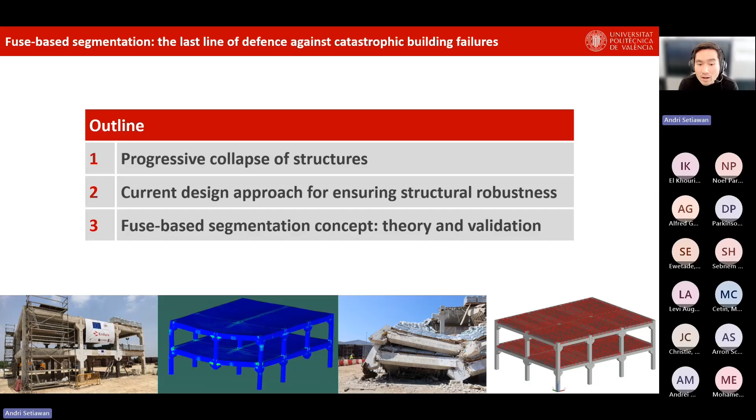The outline of my presentation today will be divided into three sections. In the first one, I'm going to give a bit of introduction about progressive collapse of structures, what are the main definitions, and what is the consequence of having this kind of phenomenon. In the second part, I'm going to discuss in more detail about the design approach that we have in building guidelines for ensuring structural robustness. And then in the third one, I'm going to focus more on the main part of the project that I'm working on, called the fuse-based segmentation concept, from the perspective of the theoretical background, but also the experimental validation. So let's start with the first part.

I'm going to start with the sentence, our world is at risk, and let's see a bit some numbers that basically show this fact.

If you haven't read this report, I would encourage you to read it. This is a very nice document, published annually by the World Economic Forum. It's called the Global Risks Report. And in the last one, published very recently, they basically brought together collective intelligence of over 900 global leaders across academia, business, government, international organizations, and civil society. They also gained some information from 100 thematic experts, including risk specialists, and asked, what are the top 10 risks that we are facing globally at the moment?

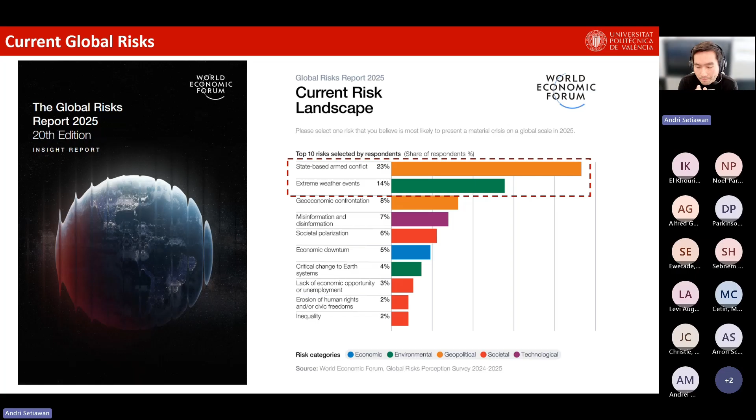So we can see here that in the top 2, we have state-based armed conflict, which is basically based on the geopolitical tensions that we have nowadays, but also extreme weather events caused by climate change. And these two top risks are serious threats for our built environment. Let me show you some additional numbers.

Here I show you the data on the number of extreme events in the last 20 years, from 2000 to 2019. We can see that all these numbers increase significantly compared to the last two decades, showing that not only are hazards becoming more frequent, but also more intense.

We can see that the consequences from these hazards are also increasing dramatically. In 2023 alone, a report suggested that natural disasters contributed to more than 70,000 deaths and caused economic losses of more than 250 billion US dollars.

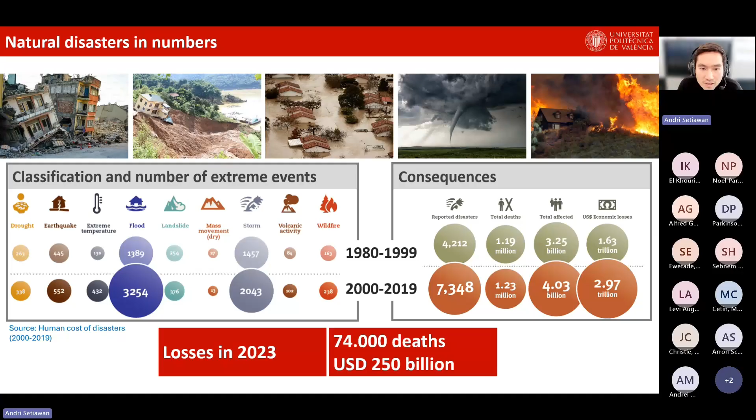These natural disasters can basically create damage in our structural systems. If our structural system is not resilient or robust enough, it can create what is called progressive collapse. We have seen this phenomenon on many different occasions - from the failure of several bridges, for example the most recent one in Baltimore, but also buildings like in Eindhoven, New Orleans, and Miami, the Champlain Tower South in 2021.

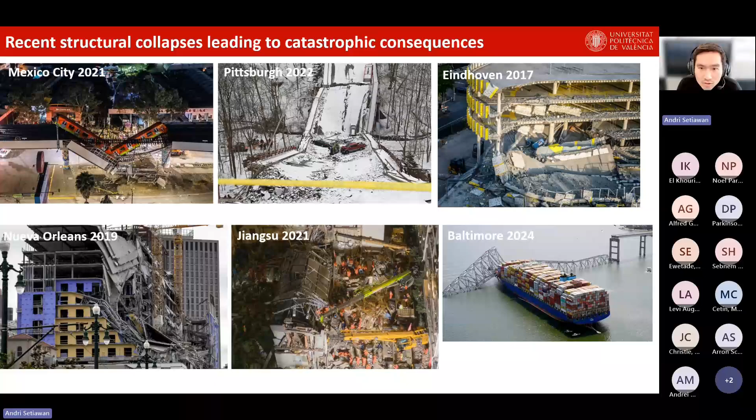So let's start to define what progressive collapse is. There are many different definitions from different literature or resources, but I pick one from GSA: progressive collapse is a situation where a local failure of a primary component leads to the collapse of adjoining members, which in turn leads to more collapse, and at the end the total damage becomes disproportionate compared to the original cause.

So there are three keywords here. First one is local failure. The local failure that we have in buildings or bridges can start either by vehicle impacts, or it can start because of small gas explosions or fires and so on.

What happens is this local failure then triggers further load redistribution in the system, and it can create further collapse. You can see it as a domino effect or a chain reaction that leads from one position to other parts of the building, and at the end the size of the collapse will be completely disproportionate compared to the size of the initial failure itself.

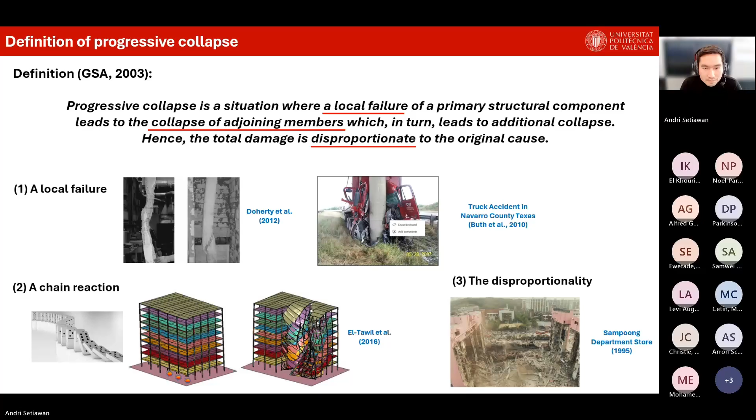I'm going to show you our group here in Valencia - we also do a lot of outreach. We created this with a model kit, let's say, to simulate what progressive collapse looks like. You can see here.

So progressive collapse starts by a local failure element. For example, in this case we trigger failure of one of the columns in the building, and this triggers load redistribution, and then it pulls the rest of the building so that you have a total collapse that starts just by a local column failure in the third floor of this building.

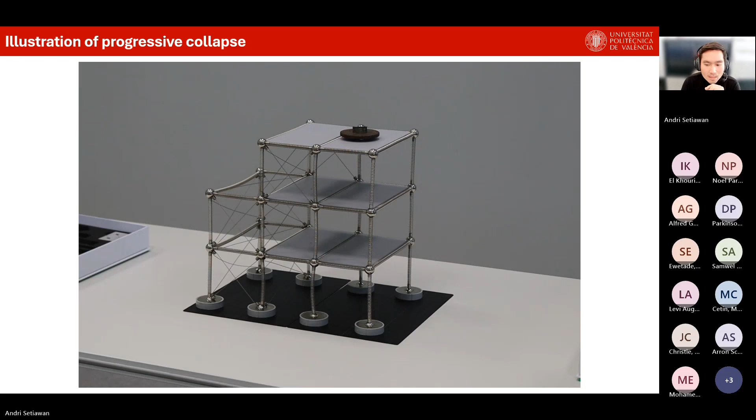Now I'm going to move on to the second part of the talk. If we know that progressive collapse is a dangerous phenomenon that creates high consequences in terms of human loss and economic losses, what do we do about this? How do we approach this problem?

So in this second part, I'm going to discuss the current design approach that we have in our building codes or building guidelines to ensure structural robustness.

So the total probability of collapse is basically a product of three components here: the annual mean rate of occurrence of the hazard, the probability of having local damage in one part of the building if hazard H occurs, and the probability of having a disproportionate collapse given that the local damage occurs.

So how do we minimize the total probability of collapse? Theoretically, you can reduce either of these three components. Of course, the first and most logical one is to prevent the hazards from occurring in the first place.

This can be done, for example, by the layout of the building. If you have explosive or chemical materials in your building, you need to store them in a location that is far away from crowded places in your building. But in some occasions these hazards are unpredictable.

For example, if our buildings are subject to terrorist attack or bombing, you cannot predict this hazard in the first place. So what you need to do is try to protect your key elements in the building - some strategic columns or walls - so that they can withstand this threat without being severely damaged.

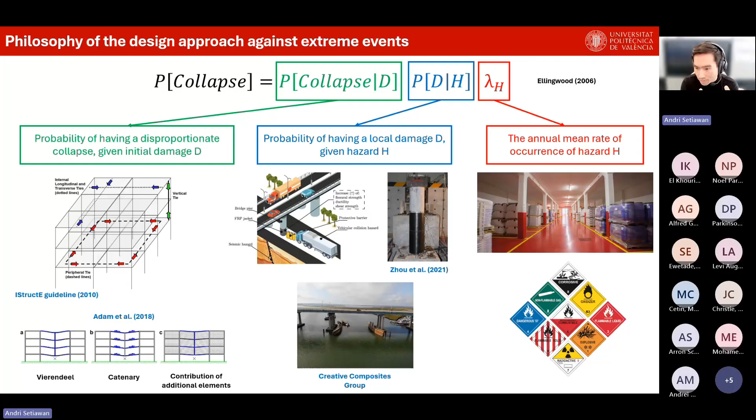So this philosophy basically has been evolved for many years. The first code of practice in 1972 was published by IStructE actually after the collapse of Ronan Point in the UK. And then this code has been evolving a lot, adopted in the Eurocode, but also mostly in the US through the Department of Defense guidelines like GSA and UFC, and also the next generation of Eurocode.

But according to all these codes, if you try to extract the key information, there are three key approaches to design buildings so that they are robust enough to prevent progressive collapse. First one is key elements. Basically, you need to identify what are the critical locations in your building, and then you need to design these key elements so that they can resist a certain magnitude of pressure or forces, so that they can withstand even unforeseen threats.

And then the other two, focusing more on the last part that I mentioned before, which is basically to create a system redistribution of loading by tying rules or alternative load path. With tying rules, what they usually do in practice is that you need to have a continuous reinforcing system from one end to the other end of the building, so that you can tie all your structural elements together so they can act or work as a unit.

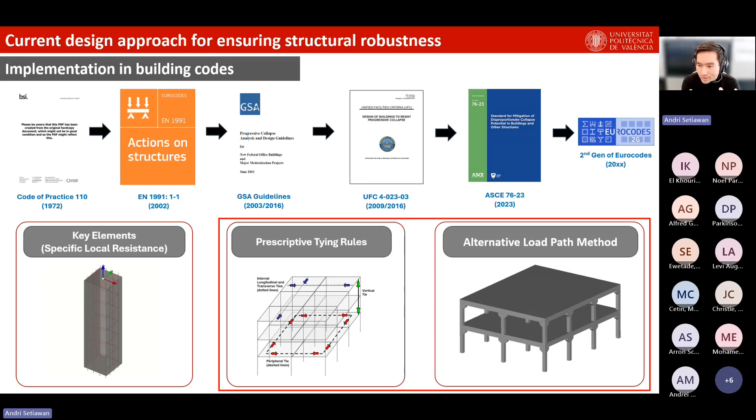Or alternative load path, which is basically a more explicit method where you perform a notional column removal in your building and then explicitly check whether your building has the ability to redistribute the loads from these elements to the surrounding part of the structure. So this afternoon, we are going to focus on this continuity or this tying rule. In what scenario this continuity is beneficial and effective. And I also want to highlight in what other scenarios this continuity can actually create a worse situation, or it can backfire or create like a boomerang effect.

So let's talk a bit about the duality of continuity, when continuity is effective. I will play this very nice illustration video. It shows three mountaineers on a mountain, connected to one another using a safety rope. Why do we need a safety rope? Because if one of our group members slips and falls down, the other two can basically pull this falling mountaineer so that you can save this person.

So this is the concept of continuity, and this has been proven effective in some real world incidents. For example, here we have the New York building, this one basically next to the center. And this one also, some buildings which were damaged by ballistic missiles in Kiev, Ukraine. So through this continuity, even with sufficient damage, you can still maintain the integrity of your structure so that the collapse will not create further propagation.

But let's see the other extreme, when continuity can actually backfire. Let's use the same analogy, but this time you are having a large group of people. Let's say you have a group of 15 people walking into Mount Everest, and all of them are connected with the safety rope. But what happens in this situation is more than 10 people in your group fall down altogether. So what happens is that through the same safety rope, these 10 people can actually also pull the rest of the group down. So in this scenario, although this is the last effort you will do, the only way to save the rest of the group is to cut the ties.

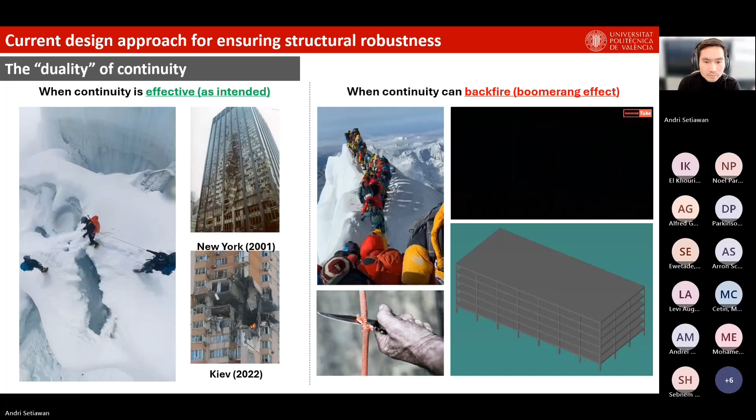Let's see some examples where continuity can actually create more catastrophic collapses. I'll show you three different examples. First, when you have long, slender buildings, with one part located on soft soil, you can have local foundation settlements. In this case, through this continuity, the part that goes down will pull the rest of the building with it.

Or in the other case, where you have wide span structures where gravity dominates your system. For example, if you have a long span precast or long span post-tension slab system, the failure of even an individual column can create an overloading condition that pulls the rest of the building down. We did a simulation of a 10-meter span building, removing one of the internal columns, and it propagates to the rest of the system.

In the last scenario, the column failure is not localized but involves a specific portion of the building. This can happen if you have a large vehicle impact or a sufficiently large bombing, starting in the internal part of the building and then spreading to the rest.

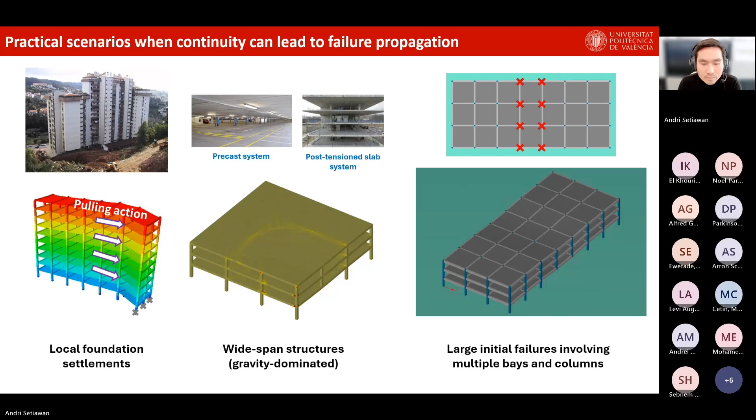Now I'm going to move on to the third part of my presentation, about fuse-based segmentation itself. We already saw some limitations, and in our projects we try to find a better way to improve our building performance so that they can also deal with situations where continuity is less effective.

So this is just an overview. Today I'm presenting two projects, Endure and Encast, which are funded by the European Commission. The title of the project is Fuse-Based Segmentation Design, Avoiding Failure Propagation in Building Structures. The budget is around 2.5 million for Endure, and for Encast around 150,000 euros for the proof of concept, where we implement this fuse-based concept specifically in a precast building system. Both projects are hosted by Universitat Politècnica de València in Spain. It started in 2022 and is scheduled to finish by the end of this year.

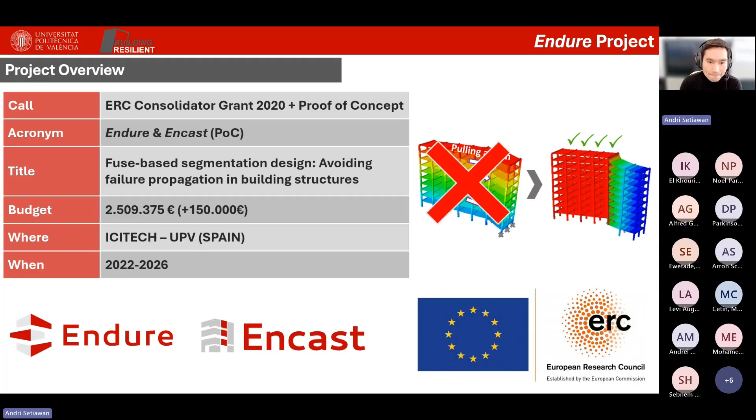So what is our source of inspiration when our group develops this idea? They say nature is the best teacher. What inspired us when developing this concept is the autotomy mechanism of a lizard. A lizard can deliberately shed or cut its tail to escape predators.

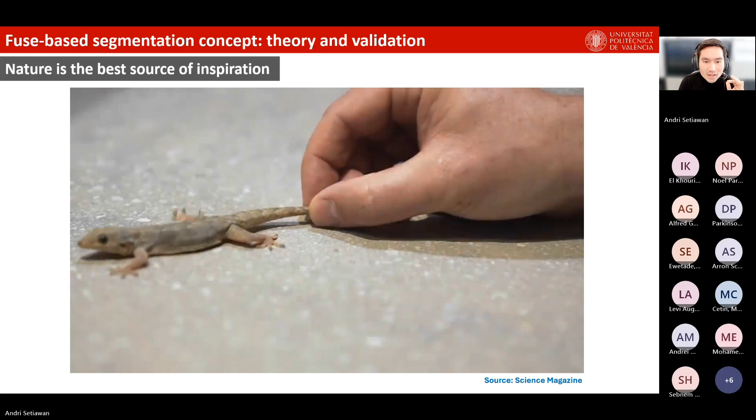We saw a very nice article written by Baban and colleagues in Science, where they investigate the structural system of the lizard tail. In fact, this tail is not a single monolithic unit, but more like a socket or a ring that can be detached by design. The lizard only needs to make some movement to trigger this autotomy mechanism, so the tail is designed to break at a specific segment. We want to take this inspiration and implement it in our buildings.

So what we want to do is combine continuity under normal conditions, under service load, small initial failure, or when the building is subjected to surface wind loading and so on. We want continuity because it helps redistribute loads, giving us a more robust and redundant system. But under extreme, life-threatening conditions, we will trigger segmentation as our last line of defense to isolate the collapse.

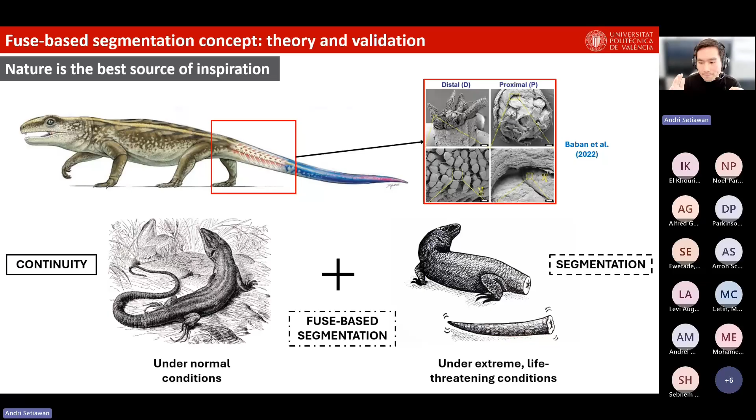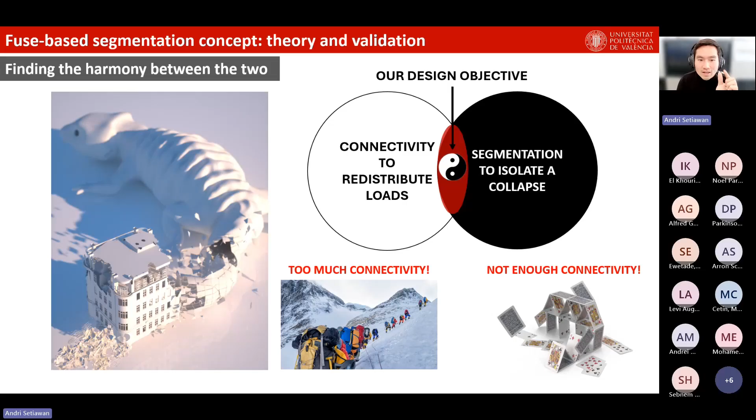The biggest challenge in our project is to find a balance or harmony between the two. We want to create lizard-like buildings that can redistribute loads but also segment to isolate collapse. Our design space is basically the overlap between connectivity and segmentation. Too much connectivity and collapse propagates, pulling the rest of the building down. Too low connectivity and you're building a house of cards that tumbles down easily, even with small wind, small earthquake, or just an operational condition. So we need to find a balance and fine-tune a solution that fits both.

When we develop a new idea, we want to test it. We want to do a pilot test to prove the concept works. So we work on a small scale first before going larger. We start with a subassembly level, which represents only a small part of a building.

We start by designing the fuse itself. Some of you may be familiar with the seismic fuse, used to dissipate energy so it protects the rest of the structure from damage. But the structural fuse we want is different, because our goal isn't to dissipate energy, but to actually localize damage and control it as a breaking point, so it breaks there and isolates the collapse from the rest of the building. There were no previous studies working on this specific goal.

So what we did was first try to find some inspiration. We explored 26 different potential designs for RC structures and another 22 for steel structures. As I mentioned before, most of them come from the earthquake engineering field.

Then we performed a multi-criteria analysis with 9 different criteria. I'll explain some of them. Reliability means we need a fuse that breaks at a specific load we want, with limited scatter. If the scatter is too high it doesn't work, because if the force is too high you collapse the whole building, and if the force is too low you create a house of cards. So we want a fuse that is reliable and controllable.

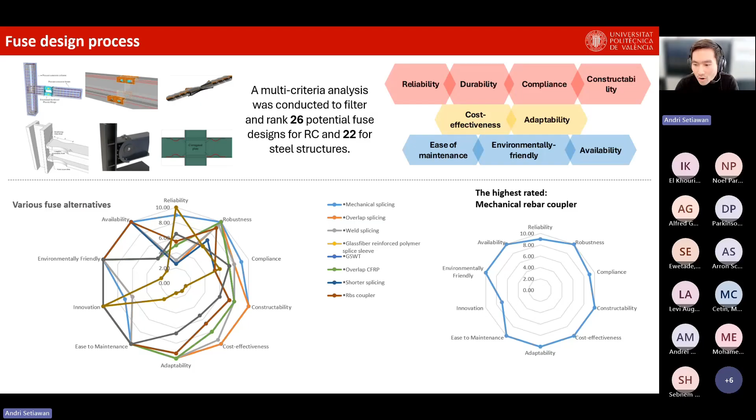So we tried proposing several different modifications to reduce the forces that can transfer through the coupler. We created a coupler with a hole to reduce the cross-sectional area, or a groove by peeling the skin of the coupler, or simply made a shorter coupler - cutting it short so the engagement length between the ribs and the bar is less, causing the bars to slip.

At the end, we performed simple tensile tests using the universal testing machine.

And we found out that our best solution is this short coupler. Basically, we can control the amount of forces we want to transfer between these two bars just by adjusting the length. For example, having a shorter coupler basically limits the forces, the stress that you transfer in the bar, to a very small value. They're also very easy to produce, easy to manufacture, and very accurate. The scatter is very low.

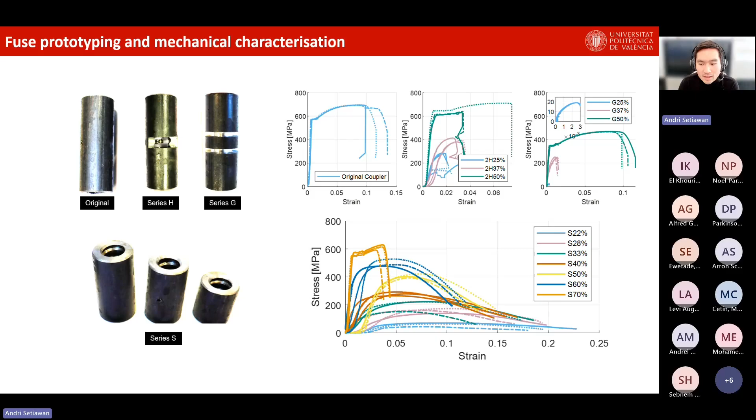Okay, so now we have the solution for the fuse. The next one is how do we test it in a building system? So this is why I need to explain a bit the test setup that is typically used in progressive collapse.

In typical progressive collapse, the top two images show the traditional test used mostly in literature. They have 3 columns, with 2 edge columns restrained on the side, and 1 column in the middle. You remove it and push the internal column to basically simulate column failure. You can do the same but with slab, which is shown on the top right. But with this type of test, what you really evaluate is only the behavior of your beam, whether it can develop flexural, arching, and eventually this catenary effect.

But what happens is, with this type of setup, you don't really simulate propagation of failure, because to simulate propagation of failure, you need to capture the interaction between this beam and column. Collapse propagation starts from one column failure, and then it propagates to the beam, but then this beam and slab needs to pull the columns and create more successive column failures. This type of setup is not able to simulate it.

In the other extremes, we have either hybrid testing, which combines a computational model and a lab specimen, transferring the degree of freedom from the simulation to your specimen, but this requires special facilities and methodology to perform. Or a full-scale building system, which is very realistic but also cost-intensive. So we don't have the tool even to evaluate how our fuse design can work at the subassembly level.

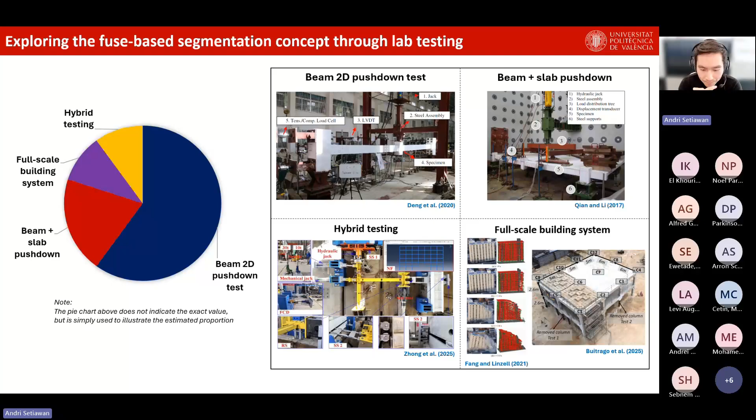So what we did, we needed to first develop our own new setup. So how do we do this? First, we design a full-scale prototype building. Designing this building helps us understand the system behavior we want to simulate in our laboratory tests. Then we analyze various different collapse scenarios, and pick the most suitable scenario that can be used to interpret and validate the effectiveness of this new fuse-based concept.

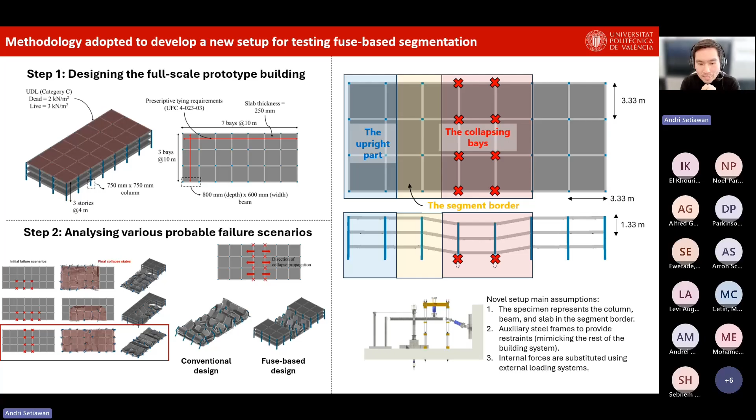So based on this, I'm going to show you in the next slide - I think it's better here. Okay, we developed a new setup that can be done without doing a full-scale building test, but it can also simulate failure propagation, unlike the typical traditional progressive collapse setup. Here we have the specimen. It consists of the ground floor column and half of the first floor column, and we have the beam and slab around the segment border.

Here we applied a column pre-stressing system, basically representing the gravity load from the second and third floor that we do not model in our specimen. And here, what is interesting - I don't know if you can see clearly - there are 2 hydraulic jacks there, one vertical and one diagonal. Why do we need 2 jacks? Because when you have collapse propagation, the slab and beam system will have a transition behavior from flexural, and then at a certain level of deformation that is sufficiently high, you will trigger this catenary effect. So why do we need these 2 hydraulic systems together?

Because we synchronize it so that at a certain level of displacement, in reality, you will have a certain magnitude of pulling forces. So we use this synchronized jack to have a kinematically consistent condition between the internal force and the deformed shape of our system.

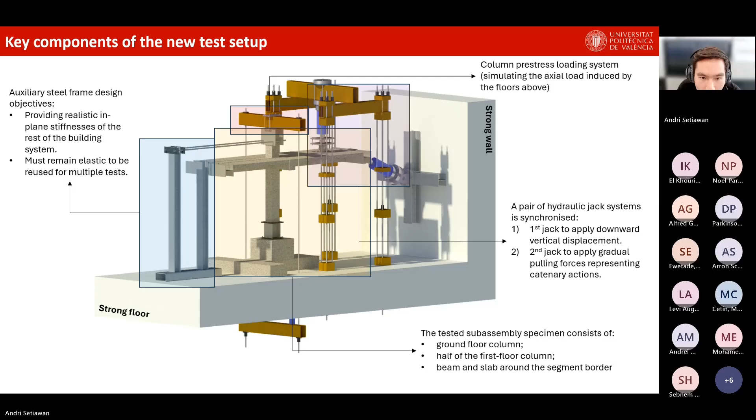So here is what I mentioned earlier. What you did at the beginning is perform column pre-stressing to represent the gravity load from the floors above. Then at the flexural stage, you push down the slab and beam until a certain level of deformation. This loading protocol is extracted directly from the collapse simulation. So from the computational simulation, you can extract the deformation of the beam and the internal forces, and we substitute these internal forces and deformation using an external jack system.

In our case, which is a scaled down specimen, after 100 millimeters is the point where you start having a transition from flexural to catenary stage. So now the 2 jacks are activated at the same time - you push down while also pulling the jack. That's phase 2. And finally in phase 3, where the slab is already inclined a lot, you just pull from the inclined jack.

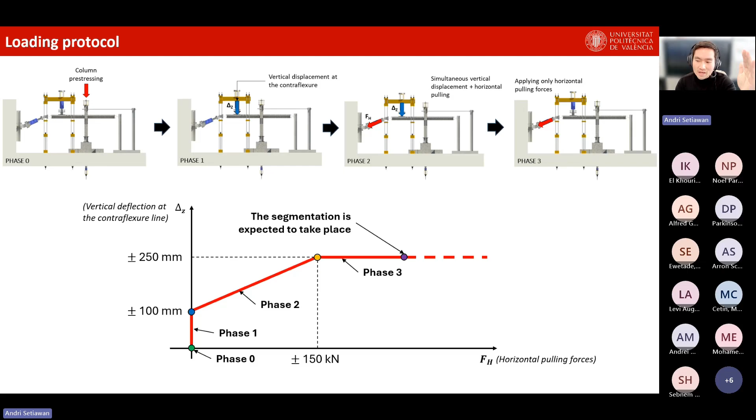So in this case, we expect that at some point in phase 3, we will trigger the fuse activation and segment the building before the column collapses. Our objective here is to protect the column in the border, because if the column in the border survives, you basically prevent the collapse propagation, so that successive column failures behind these columns can be prevented.

So here we can basically limit the drift of the column before the pulling force goes a bit more than that. So the fuse has been shown to be very effective in controlling the level of force that you allow different building parts to transfer between one another.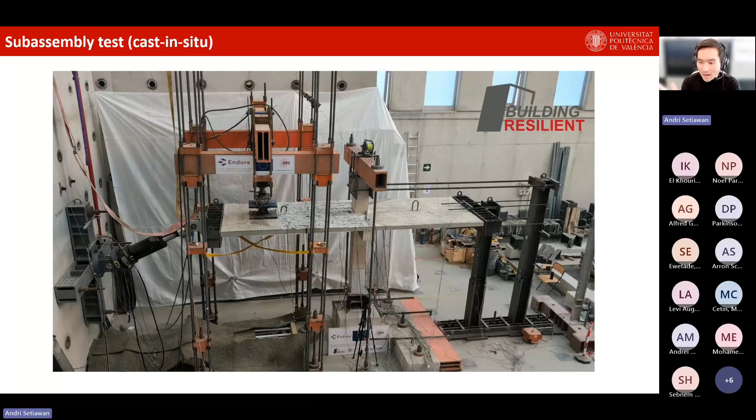So we use the same system, the same concept, but for precast connection, we have performed 2 additional tests with different precast systems. In this precast system, the fuse technology we implemented is a bit different, because it's easier with precast - they are not monolithic. So basically, you can simplify the problem by adjusting the connection to be weaker than the column, so that it breaks in the connection, but at a level of forces not sufficient to damage your column.

So you can see here, the drift of the column is very limited - I think it's less than 1%. So the connection breaks there.

And also here, I don't know if you can see, this one doesn't have sound, but you will see there is a large deformation bump. So it also breaks in the beam column interface after the corbel position. So we also create a weakening plane in this position so that it breaks at a specific predefined location, just as a lizard cuts its tail at a specific part of its body.

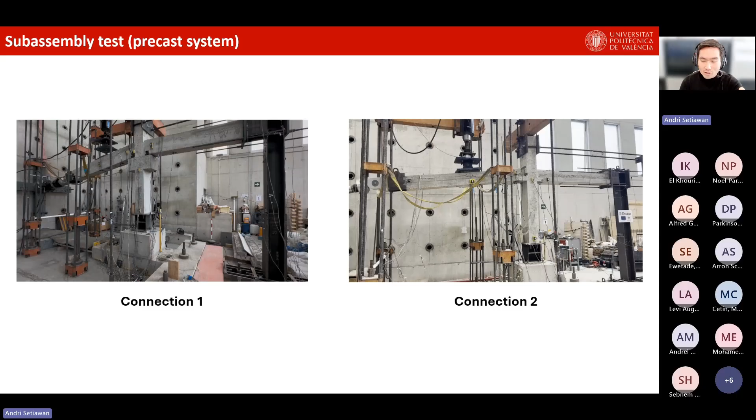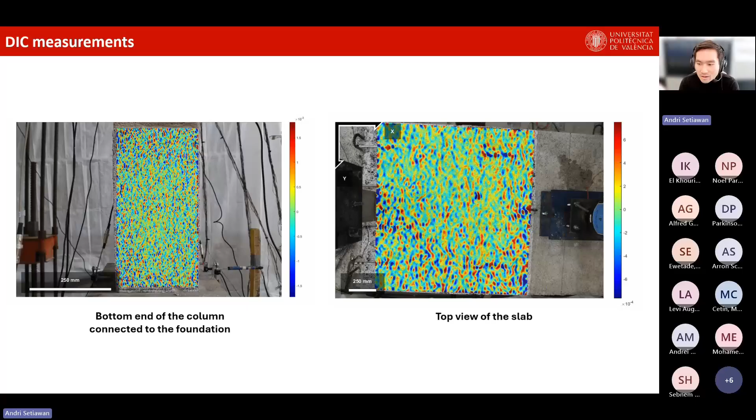Okay, so now we have successfully accomplished the subassembly test. But of course, as you're all aware, construction industry is very risk averse. They will say, okay, it works in subassembly, but we haven't seen anything in a real building. So we need to prove it otherwise.

So all the details that we implemented in this building system basically follow all the requirements that practice adopts. Eurocode, even UFC standard, we impose all these requirements in our buildings. But we tweak a modification in the connection that I will show you next.

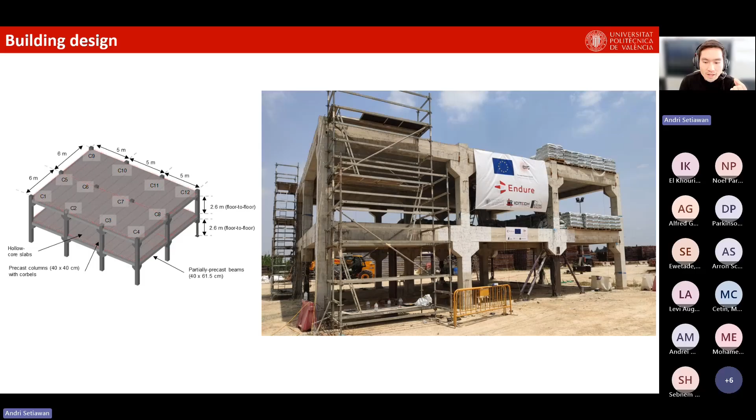Here, to achieve continuity, you need to take advantage of having this floor system made of hollow core units working together with the precast beam. Because the floor slab is very effective in developing this flexural and also membrane action.

So what we did here, we didn't actually do a modification. We just followed the strict requirements of robustness guidelines in UFC, where you need to tie all your slabs and beams together. You put some ties between hollow core units like a U-bar, and also you have continuity bars in the top part of the beam to provide negative moment resistance between one hollow core plank and the other in the next bay. We also put U-shaped ties that connect the hollow core units with the perimeter beam. So you basically tie all your beams and slabs together so they can work as a unit.

This is not new, this has been done in building codes. Now, what we do specifically, which is a bit counterintuitive, is this connection. If you refer to many different guidelines for precast systems, for example FIB, they always recommend using a full strength connection in buildings to ensure structural robustness of precast systems.

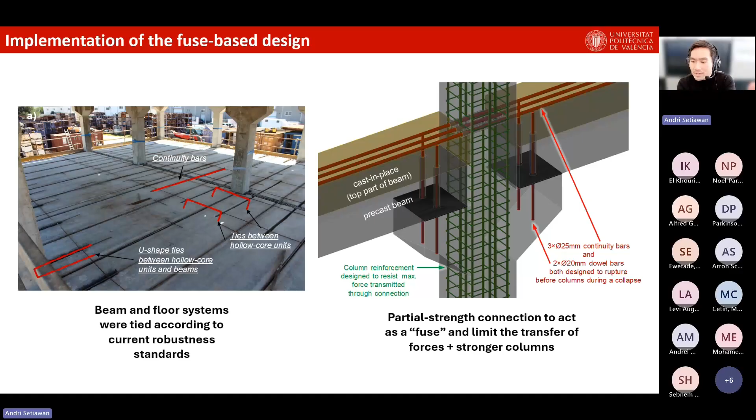So what happened here is the columns need to be much stronger than the beams and the connections that are connected to this column. So the connections will be designed as a fuse system that basically segments in the connection or in the corbel position before the columns are overloaded by this unbalanced moment and pulling forces.

So you start by erecting the columns, and then you place the beams on top, and then on top of the beams, we put the hollow core planks, we put all the reinforcement mesh, and then finally we cast the topping. So all of this process is basically a standard process that industry uses.

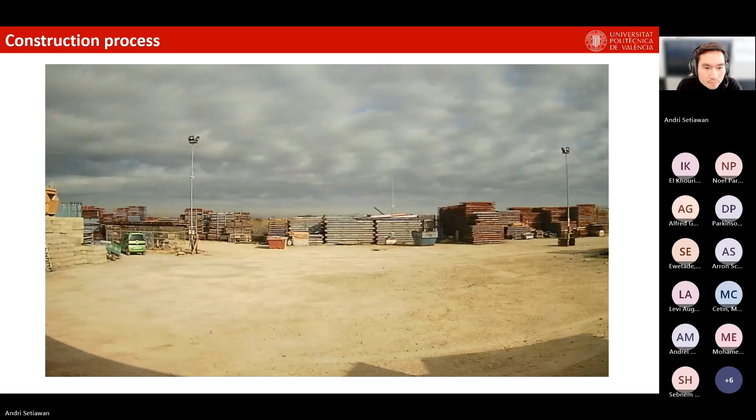And now this is the testing condition. So I'm going to show you a video that explains the boundary conditions and how we load the buildings.

So these buildings have 2 column hydraulic jacks. There are 2 edge columns that are basically made not of concrete, but of hydraulic jacks, because we want to remove these 2 edge columns at phase 1. In this phase, we want to test the effectiveness of the continuity. So after removing these 2 columns, our hypothesis says that this building must survive by redistributing the loads from these 2 columns to the surrounding parts through the continuity that we have in the slabs and in the beams.

Here we have a 3 steel hinge column. This hinge column is basically the one that we will remove in the last stage in phase 2 to trigger the initiation of collapse. But our goal is to prevent this initial collapse so that it will not propagate to the rest of the building. So this 3 hinge column can be removed dynamically from outside of the building because it's like an unstable column basically.

So if you introduce a disturbance in the middle hinge, it will just flip like this, and it creates a dynamic column removal situation, and then it will trigger the collapse. But we will see later that it should stop before the collapse propagates to the rest of the building.

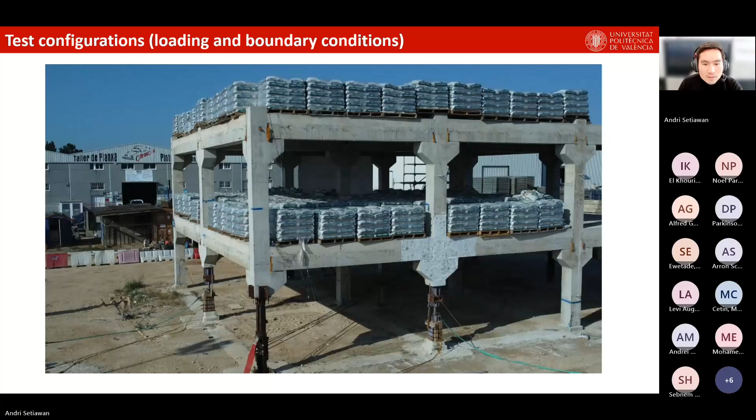So next, we put a lot of sensors. You can imagine we put more than 100 sensors here: strain gauges, accelerometers, LVDT, DIC system, and other things, because we want to monitor everything. We want to monitor how the column load is redistributed. We want to monitor how the beams can redistribute the load by developing flexural mechanisms, and how the segmentation happens in the border that we design.

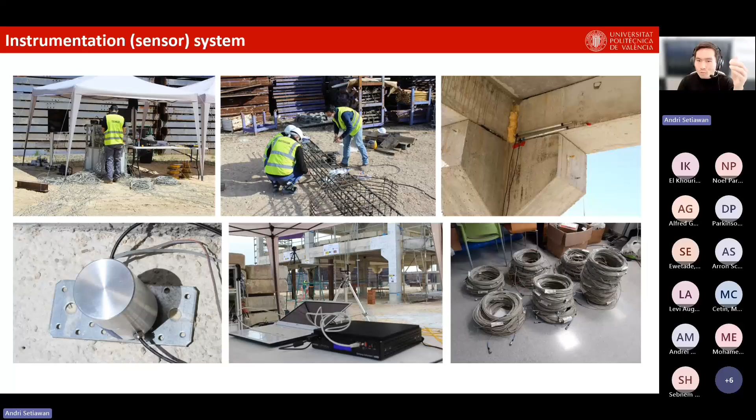So now let's see the video of the first phase of the test, which is basically to test the continuity.

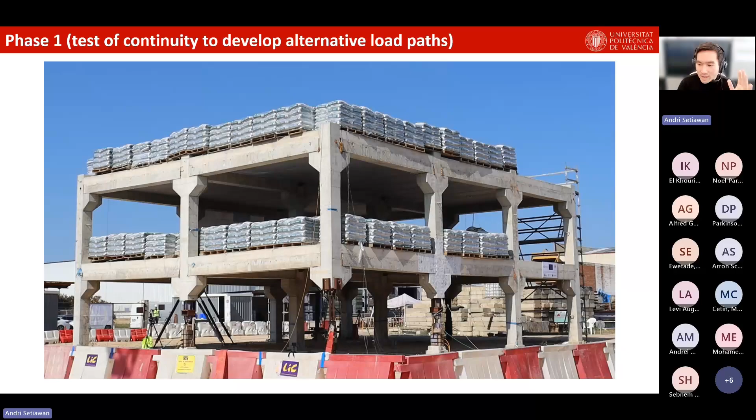So in this phase, here I will just show you some numbers, but you can refer to the text for more details. When we remove these 2 columns, the load mostly goes to this C7 column, which is basically the internal column, and this can create an overloading condition. So it's important to have a residual or reserve capacity in your column, so that you can redistribute the loads safely to other parts of the building.

What are the most interesting things here? One thing is that columns located far behind the building can actually experience unloading. The loads are being unloaded, because this building now moves a bit like a seesaw—one part is loaded more and the other part is a bit unloaded. In very extreme scenarios, as I will show you later, the corner columns located on the opposite side of the collapse can actually go into tension. And this tension can create a global overturning failure, because columns in buildings are mostly designed to resist compression, and in these extreme scenarios they can actually behave in tension.

So this is also a lesson learned that we learned from this test. And here you can see the rotation of the beam is quite significant, and you have yielding of this bar in this position. In the negative moment, the bars have already yielded.

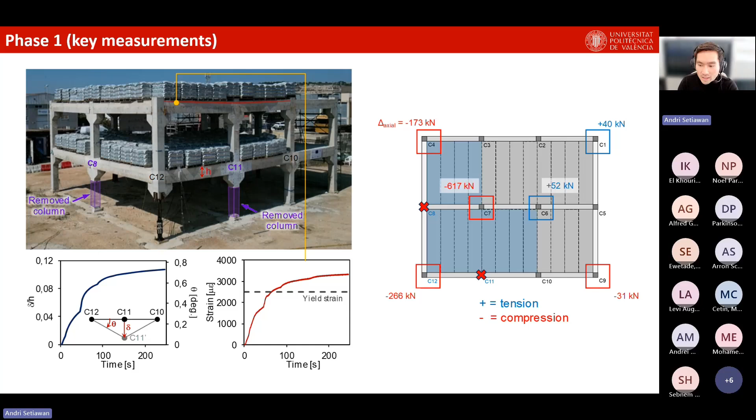And this one is the second phase, where now we test the ability of this building to segment. What we do here is we remove this corner column.

So you can see here, the collapse was initiated, but it stopped just at the border where we planned to isolate it. So this is our segment border. You will see later from the top.

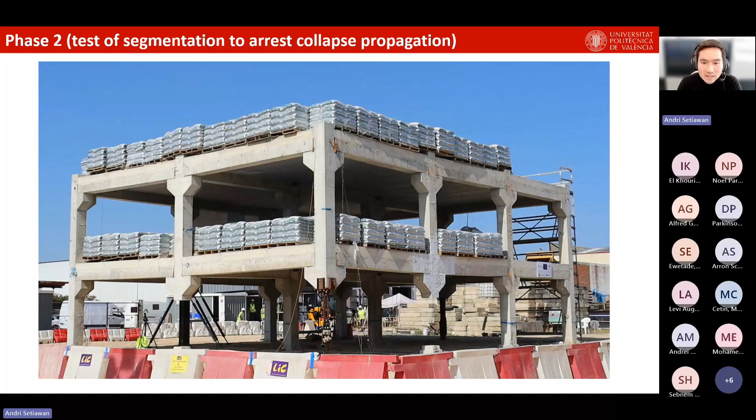Okay, this is the post-collapse inspection using drones. You can see here, this is the segment border that we created. So basically, all the connections break here in the corbel, in the dowel position. You can see the corbel are completely broken here, but the column survives without being overloaded.

And here we also see some bond failure and slippage of the rebar mesh that actually helps in this scenario to achieve segmentation. Of course, bond failure usually is always anticipated not to happen, but in some extreme scenarios, this can actually be useful to allow it to slip. And here we have the rupture of continuity bars, but also the corbel is destroyed. This corbel and the dowel bars here, let's say, serve their purpose as a fuse element.

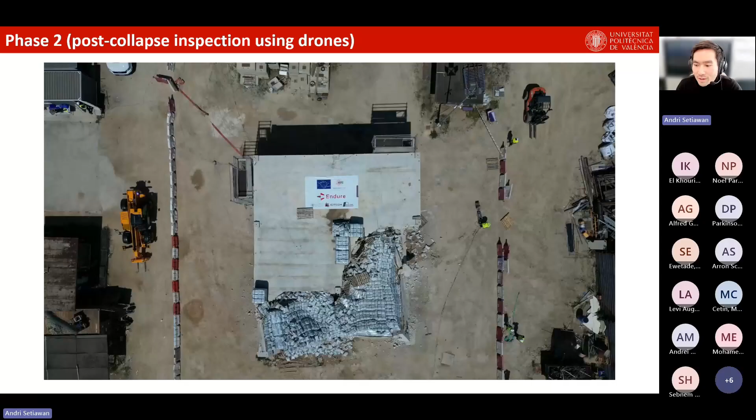Okay, so now we also performed some computational simulation, and the simulation was done actually before the testing day. So we rely on the simulation to predict what happened in the testing day. And we were very happy because the prediction of our computational models was very accurate. Here you can see the comparison between the two.

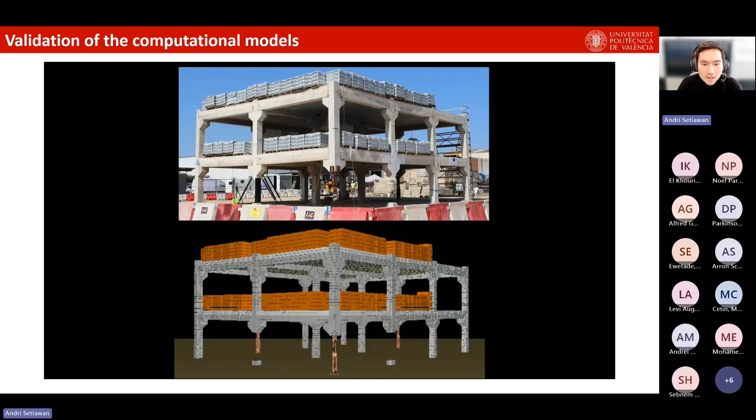From different angles, and you can see how these buildings behave exactly as expected in the real test.

So another interesting thing is what happened if this building was not designed with the fuse-based segmentation, but instead if the building was designed according to traditional approach or according to current guidelines. So this is what happened.

The one on the left here is the building that we designed and tested with the fuse-based segmentation. And the one on the right was a building designed according to current standards. And with this full strength connection, what happened is it will actually pull the columns and trigger the total collapse of the building, instead of segmenting it as in our fuse-based design.

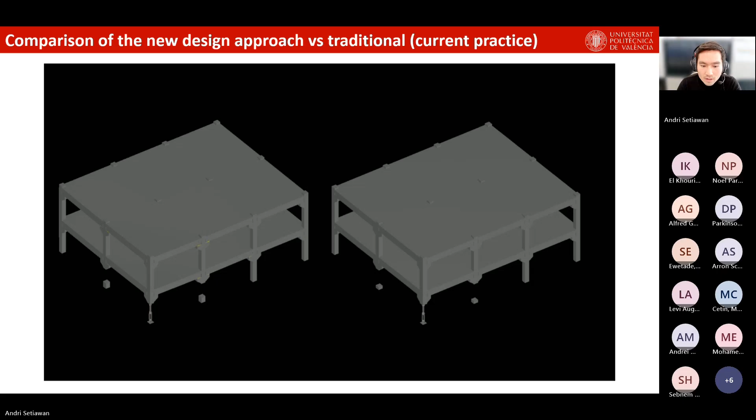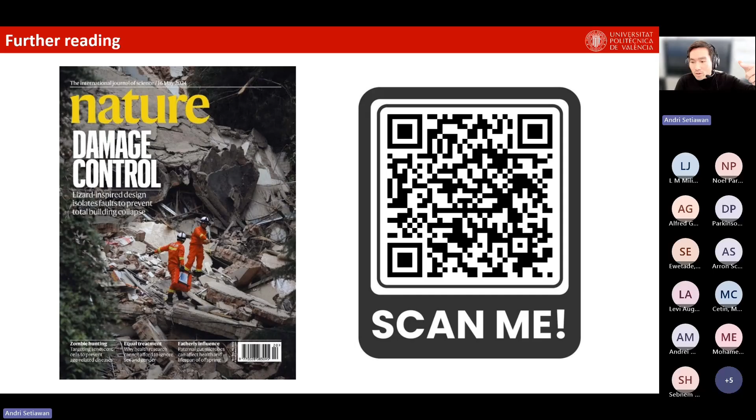Right? So, of course, because of the limited time, I cannot discuss further in detail, but if you are interested to know more, you can scan the QR code here. It will direct you to the article where we report in detail the test results, the philosophy, and also some key data from the test. If you want to do some computational simulation, you can also use all the raw data that we put there.

So our upcoming test campaign, I'm going to finish very soon. This is the steel building that we will test next month in March. The steel building has the same size as the precast one, which is basically 12 meters by 15 meters in plan, and 2-story height. And yes, we want to test the same thing here, whether this building can actually develop ALP in phase 1 and then segment the building in phase 2.

Here, what is interesting is we use the technology that is used in seismic design, which is basically reduced beam section in the beam. In seismic design, you use reduced beam section basically to control the yielding of the beam, and then to protect the columns. But here we want to test if it also works to isolate the collapse and focus the fracture at that position.

So, according to our simulation, it works well. So fingers crossed that it also works well in our test next month.

Okay, so fingers crossed for the success of the test for 2 reasons. Of course, the first reason is because if this test is successful, we prove that this method can be scaled up to real buildings in construction. But also because our PI, our professor Jose Adam, promised to share with us the jamón ibérico for the whole group if we manage to perform this test as good as the simulation. So fingers crossed for this.

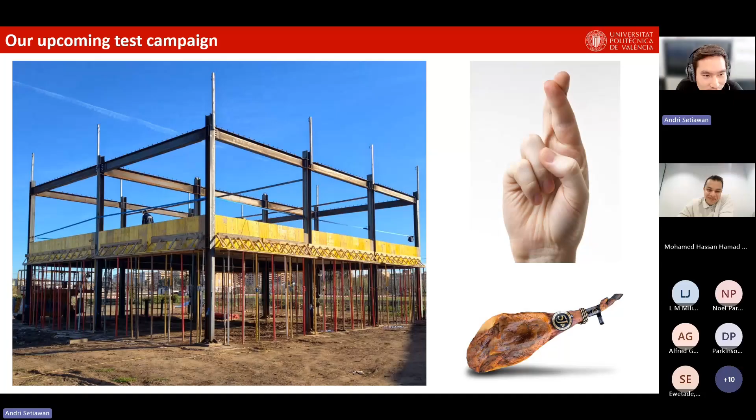So to conclude my presentation, currently our built environment is facing severe and more frequent threats from both natural and anthropogenic hazards. And this requires us, our society, to build more resilient infrastructures.

As I have demonstrated and explained before, current design approaches to ensure structural robustness have been shown to work only for some scenarios, but can actually perform worse for others. This is basically the starting point of Endure and Encase.

The new approach we studied here is called fuse-based segmentation, currently being developed and tested to anticipate the limitation. The core idea of this philosophy is combining continuity and segmentation in a single building system. Continuity is useful to prevent small initial failures, allowing redistribution and sufficient redundancy and energy absorption in the building.

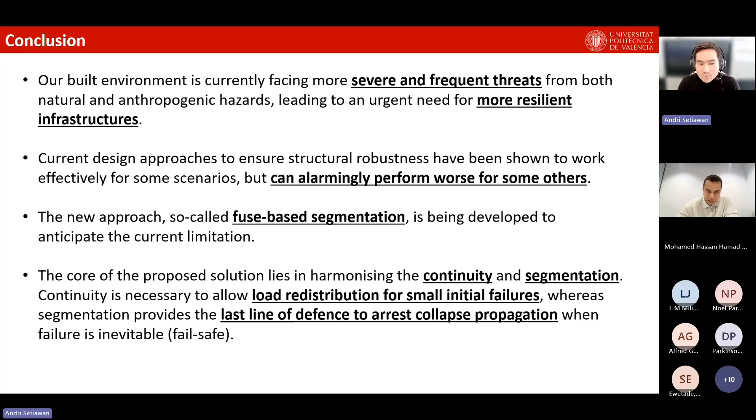But in unforeseen scenarios that are more extreme, which are basically inevitable, the segmentation provides the last line of defense to arrest collapse propagation. So to conclude, as I mentioned at the beginning, our world is at risk, but we can create a more resilient society.